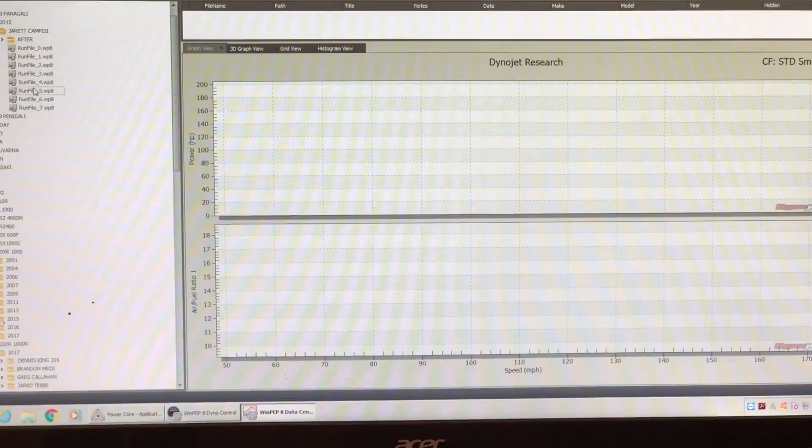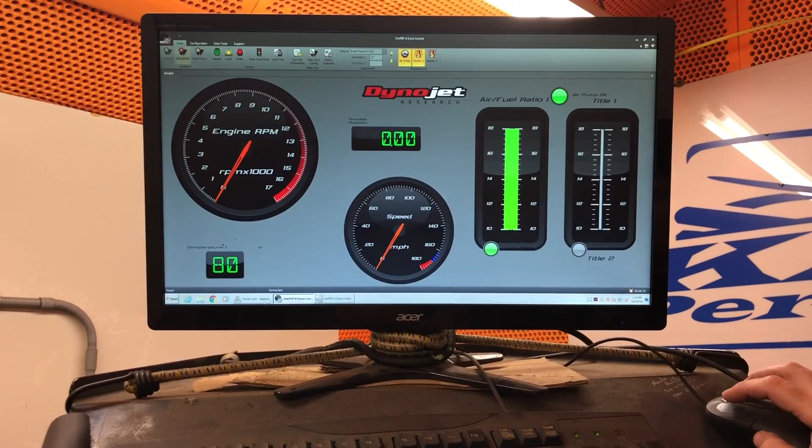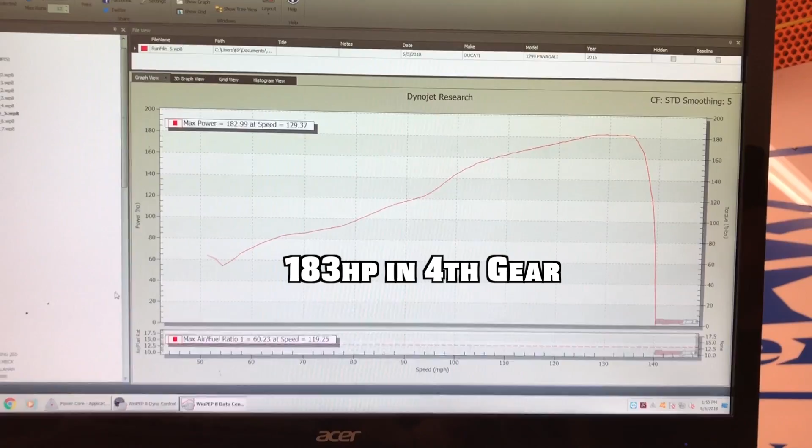Alright guys, here are the results. Keep in mind it was about 97 degrees in here last time. What is it now, Jason? 80 degrees, okay, so it's 17 degrees cooler, which will definitely have an effect on these numbers. Like I said, it was 181 before. In fourth gear we did 182, almost 183. And then in fifth gear he did some pulls and we got 186 and a half. That's pretty solid.

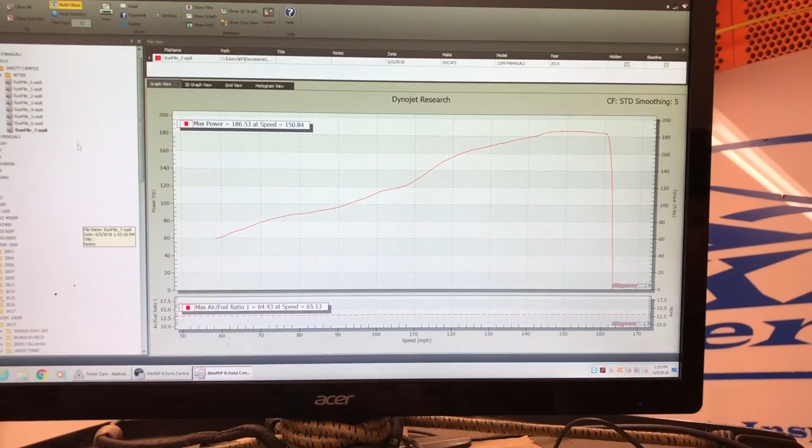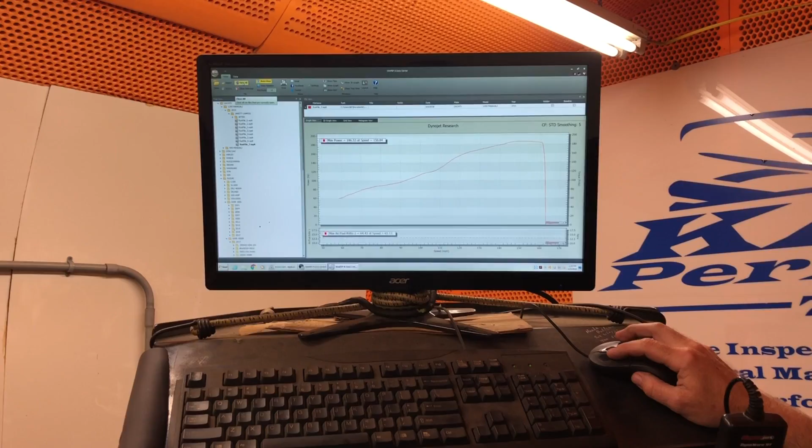Rapid Bike did mention sometimes these bikes will pull higher in fifth gear, so that's pretty cool. They also mentioned usually guys do these dynos after they've been to the track for a whole day, all-out throttle all day long. Obviously I wasn't able to do that. So 186 horsepower on a bike that weighs 380 pounds is pretty freaking insane. We're really happy with that, and thank you Jason for taking the time to do this again for us.

We really appreciate it. So there you go guys, in race mode with traction control off and wheelie mode off, in a little bit better conditions with all the changes we made, we picked up 2 horsepower in fourth gear, and another 5 horsepower in fifth gear, ending up at 186 and a half, almost 187. And again, that's on a bike that weighs 380 pounds, so that's pretty absurd.

I do think the Rapid Bike controller would do a better job of tuning the bike if I could ride it at full throttle, like at a track. Unfortunately I just didn't have access to do that. So overall, I'm really happy with the Rapid Bike fuel controller. I appreciate Jason taking the time to redo the dyno, along with Yaman from Rapid Bike taking the time to sit down with us and explain everything, and of course Manny too.

I try to show as much as I can on this channel, share as much as I can with you guys. I'm always going to be open and honest about what happens and my thoughts and feelings, but anytime I get presented new information, I'm always going to share that with you guys, because that's going to affect your opinions and things like that. So yeah, I think that's about it. Maybe I'll check in with you guys when we get home.

This thing is a savage. All right, so once again guys, stock horsepower on this bike was 178, and we just did 186.5. That was with the Rapid Bike auto fuel controller, the full Akrapovic system, and the Sprint air filter.